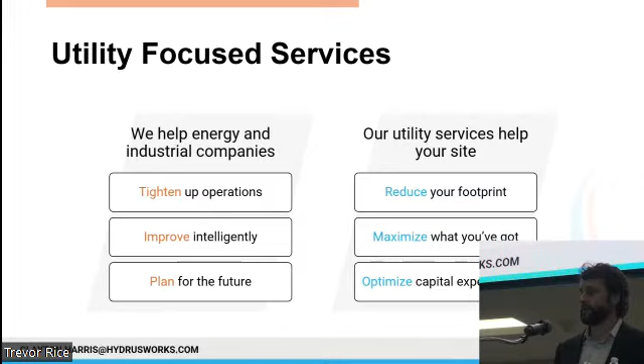What we do at Hydrus is we help sites struggle with their industrial utilities. Most of our clients are refiners, so whether you're looking at improving your utility system, planning for the future, or whatever it is you're trying to focus on with utilities, we should be able to help you with that.

So I'm going to preach to the choir a little bit. If you've ever spent any time in utilities, we think utility systems are important. They serve the needs of multiple processes, and they are the only systems that can impact an entire operation. So it's not hard to imagine, if you lost a steam system or lost your air system, how quickly the processes are going to shut down.

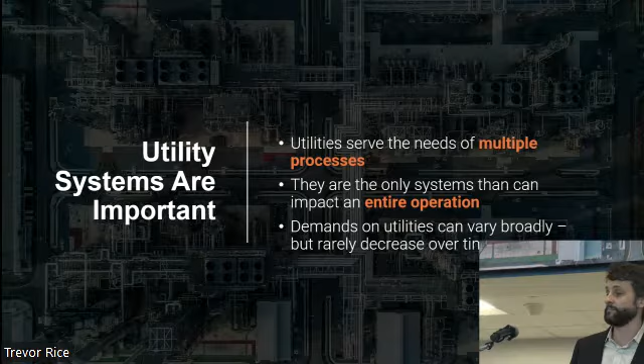So they are important systems, and the demands on these systems can vary broadly from day to day and sometimes season to season, but these demands are rarely going down. These utility systems are put under more stress and more strain over time, as more expansions and more needs are put on these systems.

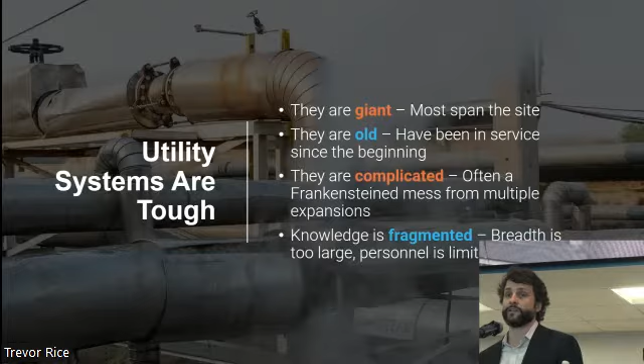They're tough systems. They are giant and old. They span the entire site, and they've been around since the beginning. So since that first column went up, there was probably a utility system built nearby to support that process. And so they end up being these complicated Frankenstein monsters that have been kept alive over the expansions of the plant.

Over 50, 60, 70 years, and because of this, knowledge tends to be fragmented. You're lucky if you've got a single person that knows a whole lot about a single utility system, let alone a team that knows everything about all the utility systems. The breadth is just too large. These systems are just large, complicated spaghetti bowls that are difficult to manage and difficult to control.

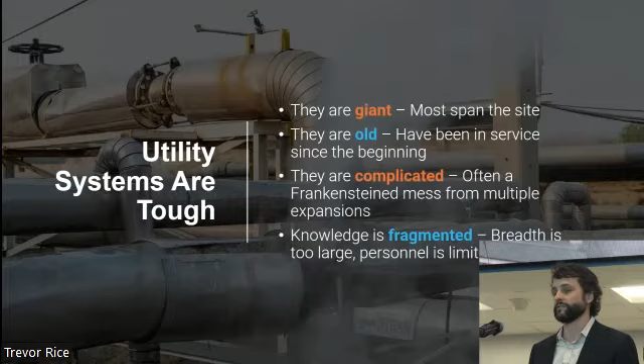Historically, they're low on the totem pole. They are not the most attractive systems to work on when it comes from a dollar standpoint. Improvements in utility systems don't always have a clear ROI, and if they do, they're typically measured in decades instead of months or years.

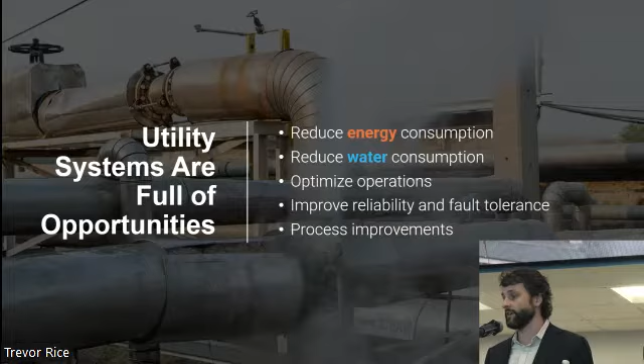And so most of the time when we get involved in a utility project, it's because there's a recurring pain point or a process improvement that knows it's gonna be using a lot more air, steam, water, or whatever it is they're after. And because of this, utilities tend to be full of opportunities to reduce energy consumption and reduce water consumption. Often there's opportunities to optimize operations in general, improve your reliability, fault tolerance, and then also sometimes you can get some process improvements out of it.

So we think utilities do better with what's called a continuous improvement approach, or continuous improvement cycle. If you're not familiar with this, it's a little bit different than the project container that a refiner, a petrochemical site might do. But I've got here 3 basic steps, and I'll talk a little bit more about this towards the end.

The first step is to standardize the work. That's to lay out your documentation and rules for when you're going to tackle a utility system or deal with a problem in it. The second is to make incremental improvements, and I want to stress incremental, because a utility system is again this giant spaghetti bowl with a bunch of components, so you've got to improve these little components one at a time. You can't make one blanket improvement to a utility system and solve all your problems with it.

And the third step is to retain and fortify that knowledge. So you're going to learn something about it when you make an improvement to your utility system, so you've got to hold on to that knowledge. You've got to fortify that knowledge and make sure that it doesn't leave when the next person comes to tackle a problem with the utility system.

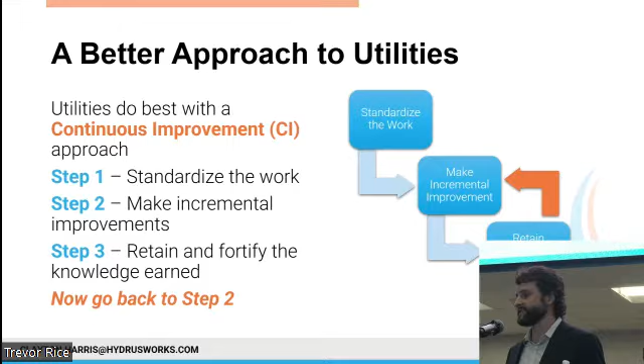Once you've done step 3, it's time to go back to step 2. So it's a cycle. You want to make an improvement, learn from your mistakes, learn from your knowledge, make an improvement, and continue and repeat over and over.

So where to start? The best place is at the beginning, of course. And I'll define how we think about a utility system. But all a utility system is in this context, in a refiner's context in particular, is the infrastructure and equipment that provides the essential resources to support the processes. That's water, steam, air, hydrogen, nitrogen, fuel gas, all the fluids that are in a big piping network that's going to be delivered to the main process so that it can do whatever it is that it needs to do. It consists of suppliers and consumers.

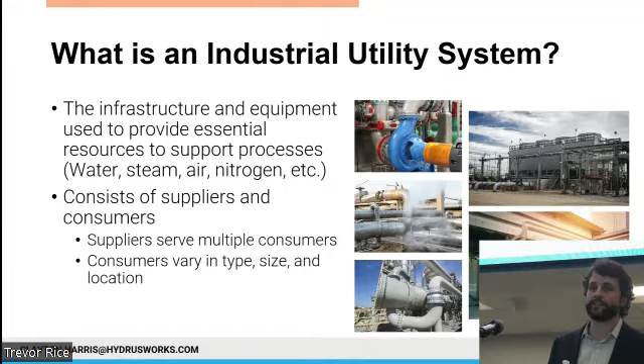Usually there's a handful of suppliers that are meeting the needs of a wide variety of consumers. Consumers can vary in type and size and location. Again, they're going to be scattered all over the site.

So you're going to need a tool. Again, there can be hundreds of components influencing utility systems.

These individual components are often well understood because they were designed by somebody with some intent for a process. So they understood their little box that their project was in. They knew how big their pump needed to be. They knew how big the turbine that drove that pump needed to be. But how all these components act together is not always as well understood. And so you're going to need an analysis tool to help you with that. This is a big system, so you've got to be able to understand how it behaves as a whole.

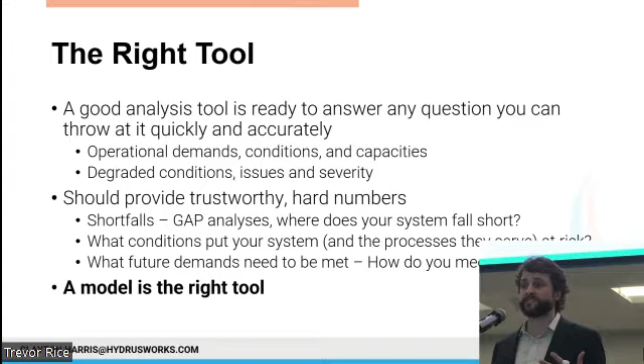The right tool needs to be able to answer any question you can throw at it pretty quickly and accurately. It's got to help you understand your operational demands, conditions, capacities, your degraded conditions, your shortfalls, help you conduct a gap analysis, help you plan for your future needs, and understand what kind of conditions are going to put your system at risk and the processes they serve at risk. So a model is going to be the right tool for that.

And in this case, in a utility system, not just any model, but a hydraulic model. All of these components, in most cases, are going to be connected by a large pipe network, which means they're all hydraulically connected, so any component can influence any of the other components on the system. It's not hard to imagine if you turn a pump on one side of the site, you're going to see an impact on the other side. Or if you turn a large user on one side off, it might affect all the other users on the site and steal flow and things like that.

So hydraulic models really are an essential tool to understand a utility system, what it's doing, and its operational parameters. And what we've learned from doing this time after time is that if you develop it correctly from the outset, if you take the right approach to building a good hydraulic model for your utility system, it can be the foundation of this continuous improvement approach that I mentioned at the beginning.

So let's talk a little bit about how we do it and some of the lessons, or tips, we've learned from building these utility models. Marketing folks like me like to break it up into 3 easy steps, but I think they're kind of 3 complicated steps. So the first step is measurement.

You've got to have good information, good data. And in a utility's case, utility systems aren't typically well instrumented, so that means going out in the field, looking at these systems, measuring, getting flow, pressure, temperature, whatever it is you need to get a good basis for that model you're about to build in the second step.

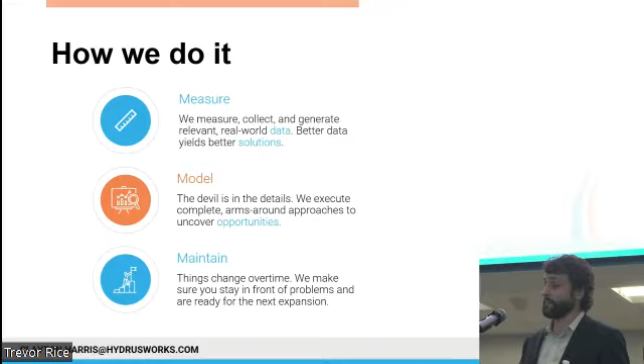That second step is model development. In a utility system, the devil's kind of in the details. These are again giant spaghetti bowls of systems, and so you've got to get your arms all the way around your systems. A lot of times what we see is an engineer focused on some kind of process improvement draws as small a box as possible around their modeling effort when it comes to utilities.

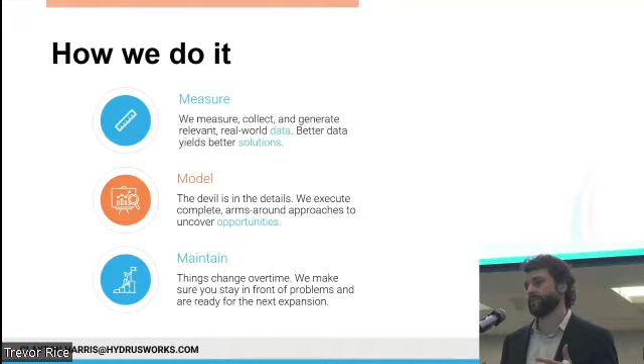And so what you end up with is a lot of simplification, and you don't really understand how that system operates, because they tried to answer that question in their little box and make sure everything was okay on their components, their system, or their part of the system, but they don't look at the system as a whole. And that's really important to do.

And then the third step is something we don't see often enough either, which is maintaining it. If you go through all this effort to build this big utility model that reflects that system, you've got a good current condition model that behaves like it does in the field today. You've got to maintain that, because that accuracy is not permanent. That system is going to change over time, so you've got to put effort into maintaining the model you've built.

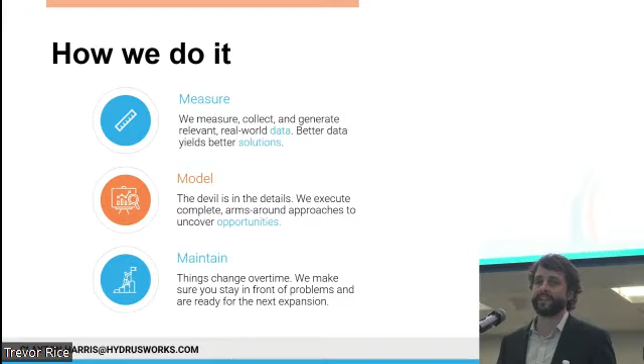So we break it into 2 phases. First is the bear hug phase. This is where you're going to get your arms all the way around the system, spending a lot of time understanding its demands, its capabilities, its limitations. And once you've done that big first effort, you're ready to start answering the real questions that probably got you looking at that system in the first place. So you do your analysis, your what-ifs, look at different scenarios to understand what's happening.

The second phase is the evergreen phase, which is the maintenance phase. This is where you're keeping your arms around the system, staying in front of your problems, prioritizing, managing, and tracking issues, things like that, to effectively meet your demands and make sure your utility system isn't the reason for some kind of problem with the process down the road.

So I'll talk a little bit in detail about model development. Your model's got to be comprehensive and multi-purpose. If you start with the approach of just drawing your box around your problem, then you're going to miss the mark. You've got to start from the outset to be able to answer any question with that model. You may answer your specific question that got you modeling in the first place, but if you design it right from the get-go, you can answer a lot of questions coming down the road.

You've got to aggregate all the key data in this model. These systems are so large that there's a lot of information that has to be put into it - your design data, your physical data, your historical data - all that needs to be reflected in that model in its current state. If you've done your job right, it ends up being better than PFDs, P&IDs, plot plans, data sheets, and PI data, because it takes all of that information and reflects it in a single source or a single representation. What you end up with is a really good tool to do a lot of different activities related to a modeling system.

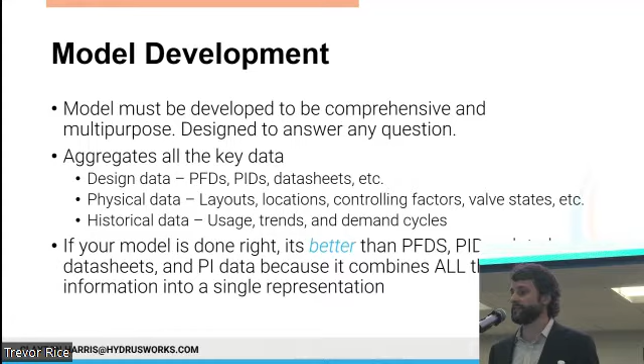So a couple of pro tips when you are hydraulic modeling a utility system. Be consistent - this probably goes without saying, but you want to formalize your modeling standards, your data standards, and your reference data. Your models should look and feel similar across the same site. So if you've got cooling water system A and cooling water system B, it should be easy for a user of the model to jump from one system to the other without having to reorient themselves and spend two hours trying to figure out which way is up.

If you've ever inherited somebody else's complicated spreadsheet, then you know that it's pretty easy to understand what I'm saying there, because cleaning up somebody else's mess is always difficult.

Traceability is important. Your references, your data sources, that all needs to be traceable. You need to have a trail of breadcrumbs so that you can follow where different pieces of information came from. That means documenting your operating conditions, the model boundaries, and your limitations. The last thing you want is someone else to use your model in a way that it was never intended, so you've got to have good documentation on that type of information as well.

Also recommend maintaining a chain of custody. Utility engineers don't tend to sit in that seat for very long - a lot of places put the new chemical engineer that's working their way up the ladder in that role. They spend a year or two to cut their teeth on site and then go from there. So that traceability, that chain of custody, is important when it comes to that model.

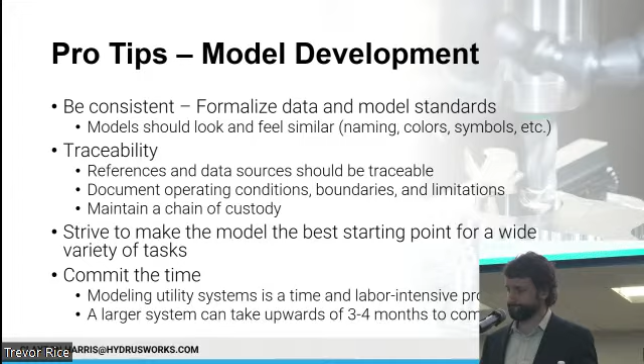Evergreening. A lot of times you build a model to answer a specific question and then you put that model on the shelf. You've got to resist that urge to just move on and do the next thing. You've got to maintain that accuracy and the value of that model because it does degrade with time. Utility systems are moving targets, but they are slow moving targets, and you've got to keep up with them.

Utility systems, again, serve multiple processes. While you may have answered your one question that you needed to answer, there's going to be more questions because these utility systems are serving 6, 7, 8, 9, 20 different units - one may be in turnaround and not go in turnaround for 5 years, but there's certainly going to be a couple other units going to change their impact on utilities.

Same thing, commit to evergreen your models and reference data, so standardize that. Integrate it into your engineering phases, your engineering processes, your engineering cycles. Make a decision on when a model needs to be touched and when it doesn't. And I would advise you, don't let those small details get lost in the noise.

So again, there's so many different components that can be connected to a utility system. If you can formalize that when you update your model, even though it's one small turbine or one small exchanger that might get turned on or turned off, don't let those details get lost in the noise. And if you've traced all that back, then you'll have a good history related to that model.

More pro tips on the evergreening. Be consistent. Formalize your evergreening requirements, so not just the way you build the model, but the way you take care of it. Formalize routine refreshment. Even if nothing's happened in the last 2 years to this utility, somebody needs to take a look and make sure that nothing's changed. Consistently remeasure and recalibrate. So go get fresh field data. Pull fresh instrumentation. Require those interim changes to be included because again, they may be useful in retrospect.

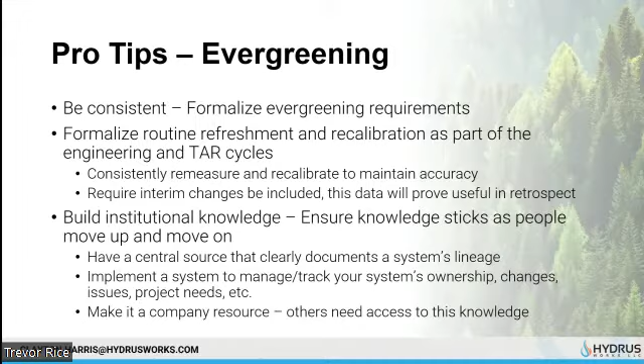And then the last one I see a lot of places struggle with is build the institutional knowledge. So that model and all the reference data around it and the traceability, the chain of custody, all those things I've talked about, really the main point of that is to fortify that institutional knowledge. So you need to have a central source that containerizes all of that information so that when one utility engineer moves up and moves on, moves to a different company, all that knowledge isn't lost when the next person that sits in that seat has to deal with that utility system.

So you need a system to manage and track that system's ownership, changes to the issues, projects that have affected it. And I'd recommend you make it a company resource. So make it in a way that you might have one utility engineer take care of that container of information, but make it accessible so that if anybody needs to touch utilities, which everybody eventually does, they've got access to that.

So I've got a couple energy savings examples from some recent projects that I'll talk about. First one is boiler feed water pumps. This client was having trouble getting some boiler feed water to one of their remote users. So they asked us to come out and develop a hydraulic model, and we did a lot of field testing so that we could validate that model. In this case, we logged pressure and flow for a week, pressure in 14 locations, flow in 8 locations, so we could get a good understanding of that system and its operational envelope.

And what we found out, because we went that extra mile to get that model good and valid and trusted, is they had a control valve that they had artificially raised the set point on for a nearby user so they could try to force water to the remote user. And what that had done is it had backed all these pumps up off in their curves. So now their operating pressure was high. These pumps had pretty flat curves, and so they weren't getting the flow performance they need.

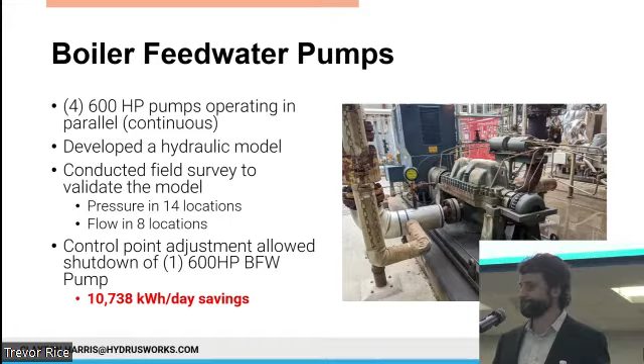Another one is raw water pump optimization. This particular system had 5 pumps, 2 systems that were jumpered together, feeding 2 clarifiers. And they were getting ready to put in a new cooling tower, so they wanted to make sure they weren't going to tax their raw water system too hard.

And so we developed a hydraulic model. Same thing, we went and measured flow and pressure so we could get a good calibrated model that was reflective of the current conditions. And what we were able to do with that model as well is help them come up with a pump combination operating map.

So we were able to map out, these are the best combination of pumps to operate for 4,000 gallons a minute, and these are the best pumps to operate for 2,000 gallons a minute. And so you always have the most efficient pump combination operating depending on the different demands as they fluctuate

throughout the seasons. In this case, 1,600 kilowatt hours per day of savings on average, not quite as big as the boiler feed water pump, but again, this was no cost beyond the cost of the study, so it's a pretty good benefit for them. It also reduced some wear and tear on some control valves at their clarifier inlets, so they were throttling their pressure right at the end of the control valve.

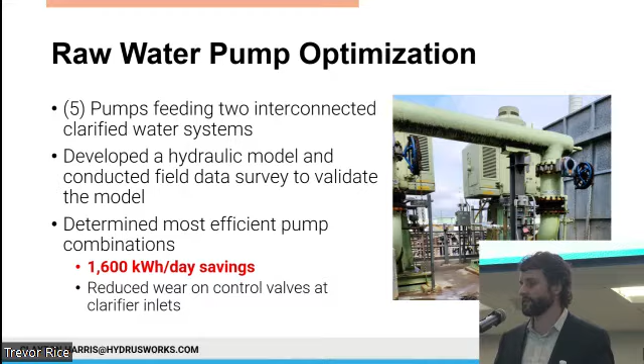Last one I'll talk about is the cost of a spillback. So in this particular example, we're working on a jockey pump system for their firewater system, and we noticed that they use a spillback to maintain pressure. This particular site was using one of their firewater pumps, and then they would use a spillback to just maintain that pressure. So they would just dump all this water that they had picked up out of the river, put under a bunch of pressure, and then they would burn it across that spillback valve and dump it

in the river. And so we did a usage survey to understand where the water was going and what it was doing, and we were able to prove to them that 3,600 kilowatt hours a day is wasted by picking up that water and just throwing it back in the river. So that's not just the cost of running the pump, that's the cost of the energy that went into that water that you just threw right back in the river.

And so just that little exercise alone was enough to prove to them that, hey, consider a VFD, the payback period's pretty quick on this, so you can actually control that pump in a much better way. And in this example, there's also some water savings, so we're looking at recycling some wastewater effluent. I think the site used about 1,500 gallons a minute, so that reduced their footprint by about 25%, or at least closed the cycle for about 25% of their water usage on site.

Food for thought. If you're looking for energy savings in utilities, parallel pumps, there's almost always opportunities there. We stare at those systems all day, every day, especially if they're not clones of each other. So if you've got a bunch of mix and matched pumps, they like to push each other around and keep each other from being at their best efficiency point. So pumps don't always play well with each other.

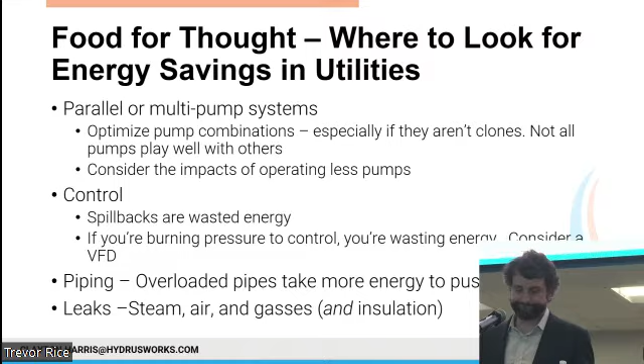So, to kind of wrap this all up: again, utilities do better with a continuous improvement approach. Require comprehensive hydraulic models be developed for all your major utility systems. These are giant systems, they're hard to manage. A hydraulic model ends up being a really useful tool to manage them.

Require the modeling of any changes. Anytime you touch that system, even if it's taking a pump down for a couple months to swap it out or whatever, use that model to understand the impacts. And then require that you evergreen those models. It's a significant investment to get a good utility model of some of these larger systems, so it's a lot cheaper to maintain that model and stay up with it than to start over every 3 or 4 years when you've got the next turnaround coming.

Step 2, leverage that model to make those incremental improvements. And you've got to accept small improvements. Again, there's tons of components that are tied to these utility systems. So if you can make an improvement on component 1, 2, 3 of the 300, eventually you're going to get a net gain in efficiency. But you've got to accept small improvements. There is no utility project that's going to fix all the problems in a utility system. You've got to just make these small individual improvements.

Well, one thing we recommend, and project managers don't love this one, but consider small improvements every time a project touches utility. So if you've got a process improvement, process expansion, make sure that they leave the utility system in a better place than they found it. Most projects want to make sure that utility is going to meet their needs, and they check that box and they move on. And so it's not unreasonable to make them improve the utility system incrementally anyway.

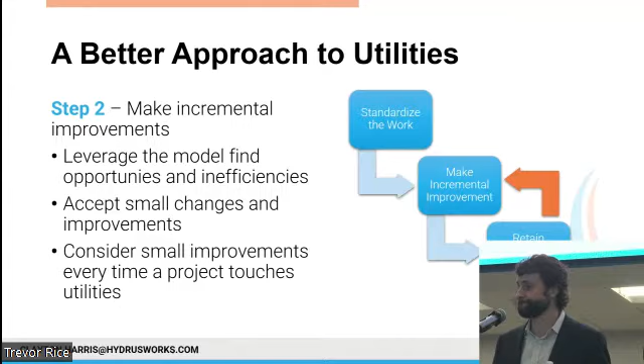Last, retain and fortify that knowledge earned. So build that institutional knowledge. It's important, or you're going to be fighting those same battles over and over. So that one's pretty obvious. But you can formalize that revision control, formalize your chain of custody, formalize that reference data, formalize how you track all the information and supporting data around that utility model. And then if you need to go all the way back to step 1 to revise your standards, that makes sense too. That's kind of part of the continuous improvement cycle in general.

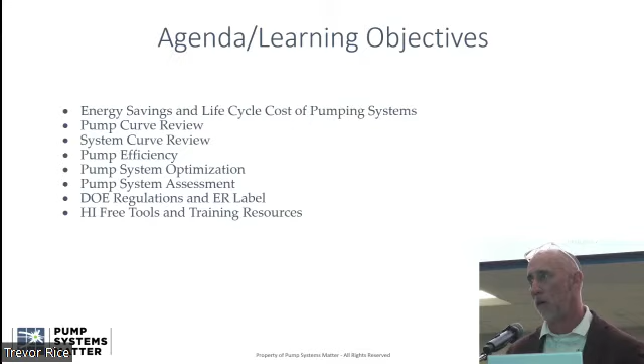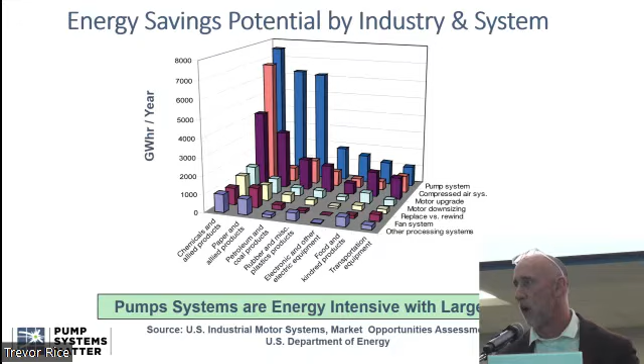As energy costs continue to increase, pump manufacturers understand that making equipment more efficient will contribute to saving energy, while traditional methods of specifying and purchasing piping, valves, fittings, pumps, and drives often result in the lowest first cost. These methods often produce systems with unnecessarily expensive energy consumption as well as maintenance costs.

So just a brief overview of the pump curve and what we're looking at. When we go back to pump systems, to fully understand how to optimize or assess a pumping system, one's got to understand the fundamentals of pumping. That's generally one of our challenges in the industry when it comes to the Institute, the assumption that everybody understands affinity laws, or BEP, or AOR, or POR. So we've changed that assumption and gone back to more of a fundamental approach, especially with tribal knowledge leaving the industry and new students joining.

Energy savings are important, but in many cases the non-energy benefits outweigh the energy benefits. In order to financially justify an improvement, often you need to include the total cost of ownership. Energy costs are at the top consideration, but there are also values for non-energy benefits from high reliability, increased productivity, less equipment wear and tear, reduced production losses, environmental impact, and increased plant safety.

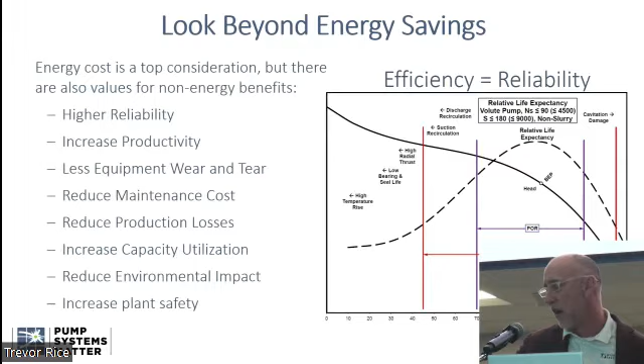We'll go back to this in another slide, but when you're left of BEP or right of BEP is when bad things can certainly happen.

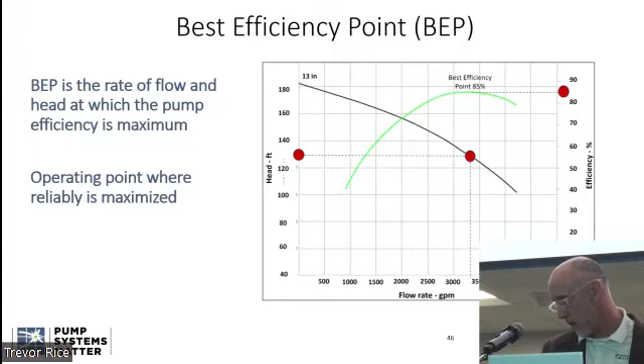Best efficiency point, again, is the rate of flow and head at which the pump efficiency is at its maximum operating point, where reliability is maximized. If you look at this example, it looks like the best efficiency point is at 85%. And if you look at the flow rate, at about 3,400 GPM, we'll be at about 85% at the best efficiency point for this indicated pump.

Real world operation uncertainty: in the real world, there's variation and uncertainty in both the pump curve and the system curve that result in an operating range over time. You have to account for variation in system head, the age and level of the system, and potential variation in the pump curve, and come up with a range of flows and head where the pump may operate.

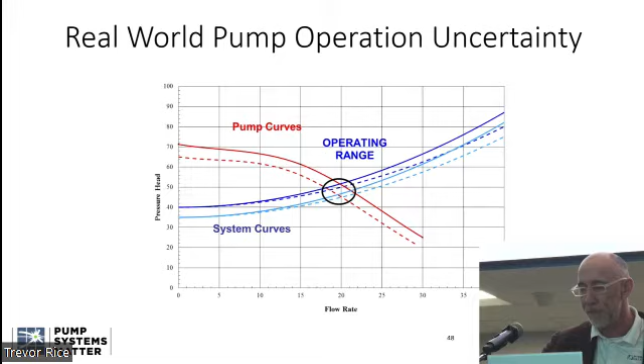Simplified pump curve: understanding that it's not always possible due to uncertainty to get a pump to operate at BEP, we aim typically for the POR. Generally the POR runs to either side of the BEP—the preferred operating range.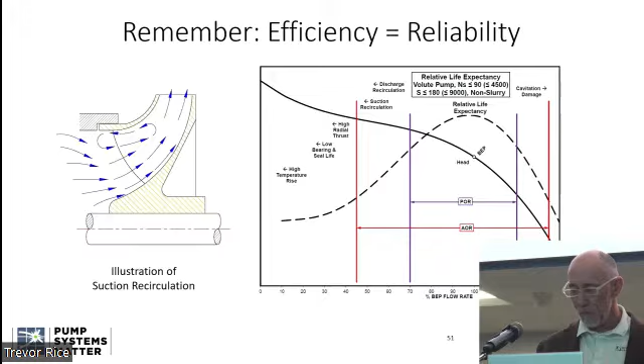So we'll go into system curve, and this is where we really spend a lot of time - on system curves and how to change the system curve from a design perspective in new designs. It's hard to change the system curve in an existing system. So I didn't spend a lot of time here.

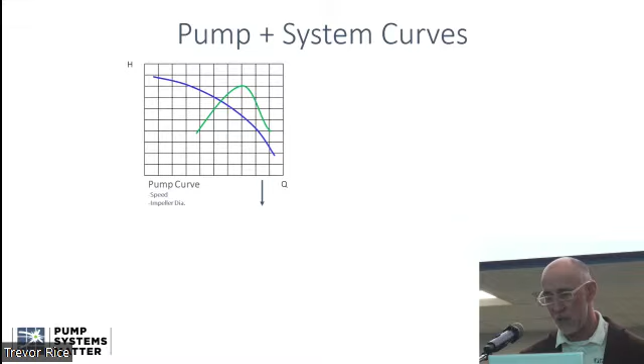But what I do want to show is kind of an overlay. So you've got the pump curve, as noted in the intro slides. The pump head and the system head will be the same. Similar to the pump, the system has a curve that is inversely sloped as a function of flow rate compared to the pump curve.

Therefore, the pump curve and the system curve will intersect at its operating point. So if you'll see here, the pump curve on the left in blue, indicated with the BEP in green with its efficiency, and then the system curve - as you put those two together, you get the operating point, which at this specific instance is at BEP. So that is where you're going to find the most efficiency when it comes to the curve.

This is a system equation for developing a system curve. I tried to keep this one as simple as I could, but I couldn't. If you'll look at...

The energy or the head required by a system can be described by physical equations. Shown here is the view from the pump. Remember, the pump will add energy required to the system. In the equation in the red box, the pump head will be a function of the pressure difference - H2 minus H1 in the illustration - elevation differences Z2 minus Z1, with velocity head differences V2 over 2G, and the friction loss with the system FL over D plus sigma K times V2 over 2G.

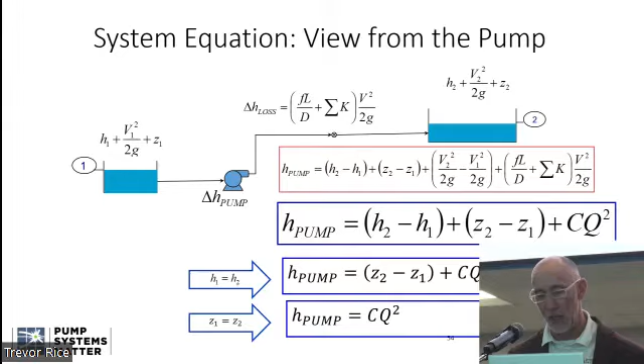In the red box, the equations are based on velocity, but if we have an existing system, we can usually simplify as we've done in the blue boxes, substituting flow rate Q with coefficient C in the velocity terms, because we assume friction will remain proportional to velocity. The final blue equation simplifies further by assuming the pressure at point 1 and 2 are equal. If the levels were equivalent, points 1 and 2, we could remove the Z terms, and the system would be totally friction head. So that's as simple as I can get with the system curve.

Pump efficiency - the definition for pump efficiency is the ratio of pump output power and pump input power, expressed as a percentage.

What is a pump and how does it consume power? A pump is essentially something that moves liquids, as you can see here. And I'm gonna answer the question on the VFD that was asked a minute ago.

There's a place for VFDs and there's not a place for VFDs. The assumption in the industry - from a pumping perspective - is that if you put a VFD on it, it becomes more efficient. That's not necessarily the case. In some cases, that is the case, but I've seen a lot of times where you put a VFD on a constant flow application and it turns into nothing more than a very expensive soft starter hanging on a wall. So maybe that answers the question.

So there's good and bad. We certainly don't want to give the impression, when we're optimizing or assessing pump systems, that just putting a VFD on it is going to make it more efficient, because that's not necessarily the case.

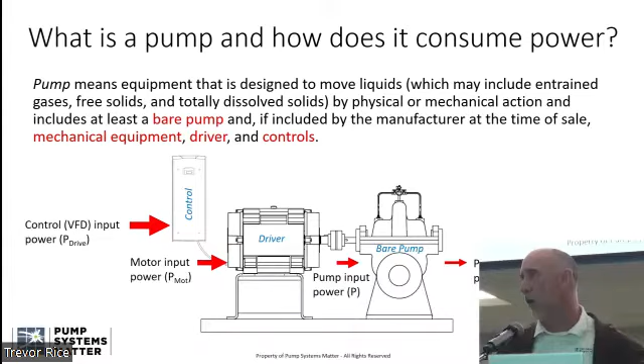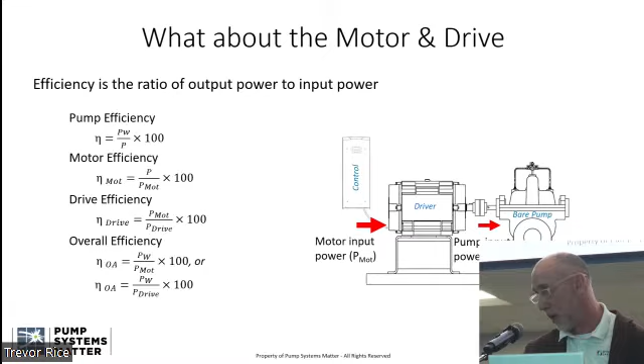This is generally the same indication here. It's going to show the efficiency going in from the backside of the motor. I can determine pump efficiency, motor efficiency, drive efficiency, and again, overall efficiency, just simply by performing these calculations.

Now we'll go into pump system optimization. What is pump system optimization? It's the process of identifying, understanding, and cost-effectively eliminating unnecessary losses while reducing energy consumption and improving reliability in pumping systems, while meeting process requirements, minimizing the cost of ownership over the economic life of the pumping system.

Opportunities in new design and existing design. Generally, if it's a new design, we certainly have better opportunity to design the system because we can look at the whole system holistically and make sure that we look at each component and design it with the best components in mind. Sometimes on existing systems, you've got to take the system you have and then try to embed it with some efficient components.

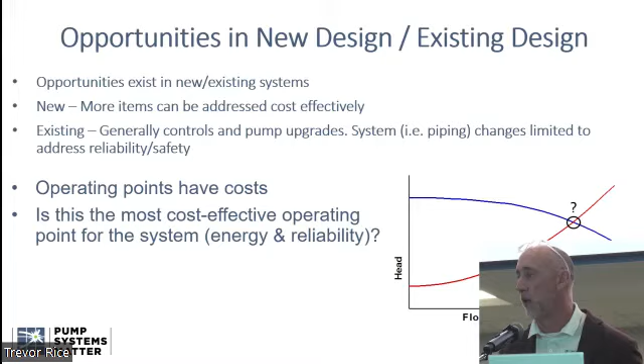Effecting cost reduction of pumps. By choosing different pumps, the pump curve can be adjusted. The pump efficiency and BEP also adjust. The pump curve can also be changed by changing the impeller size or fixed speed. So if you adjust your impeller or if you add a VFD or a control method, you have the potential of actually changing your pump curve to become more efficient or closer to BEP.

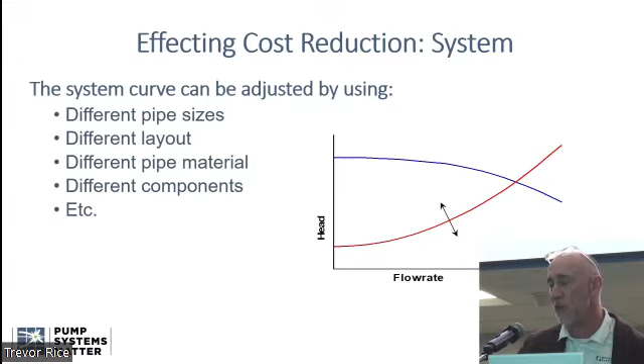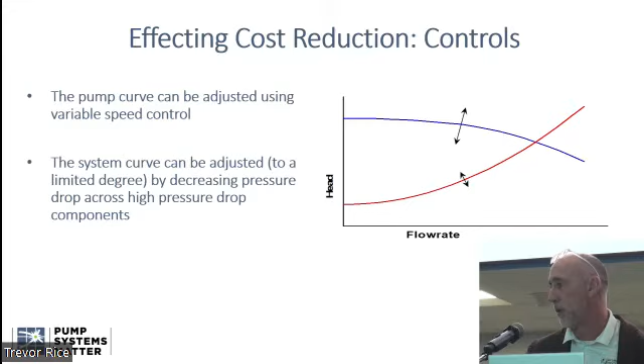Effecting cost reduction of the system, the system curve can be adjusted by using different pipe sizes, different layout, different pipe material, different components. Generally, your friction coefficient is really your opportunity for reduction in the system itself. The pump curve can be adjusted using variable speed control, as I indicated before. The system curve can be adjusted to a limited degree by decreasing pressure drop across high pressure drop components. And again, there's some opportunities for existing systems: repair the pump, impeller size change, VFD, potentially a new pump, and then in new systems, the opportunities reside in changing anything.

The operating point itself can be changed. Cost reduction opportunity is much larger.

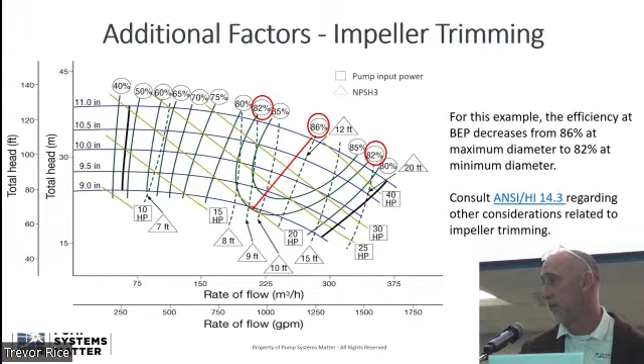Pump system assessment. I have one slide on this. We developed the only pump-centric certification or accreditation in North America. It's PSAP, which stands for Pump System Assessment Professional.

This was developed in conjunction with the Department of Energy and some utilities like PG&E in Southern California. They came to us and said, with the DOE making regulations on pumps, we're running out of opportunities for incentives for our ratepayers. Lighting's been done. We've done all the LED lighting. We've done compressed air, we're working on all that. With the knowledge that pumps are a large consumer of electricity, there's certainly an opportunity to decrease their load.

When these utilities started coming to us wanting to build these incentive programs, there's custom incentives for pumps that can be found readily. We're seeing more and more utilities developing deemed incentive plans around pump systems. The problem was who had the requisite knowledge to actually go in and perform an audit of a pump system. They didn't have anybody. It wasn't the lighting guys. The lighting guys weren't going to stop doing lighting and jump into pump systems. So what we did was we actually developed the PSAP about 3 or 4 years ago.

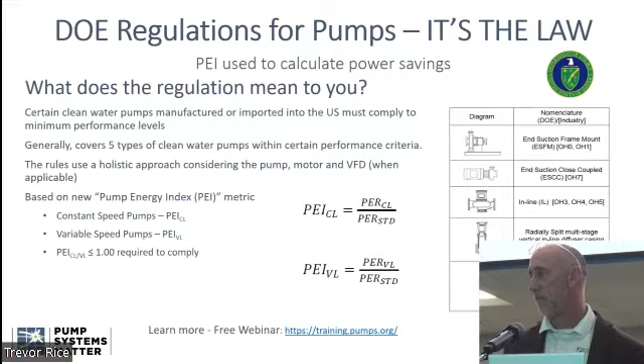So what we did was we took the manufacturers that we represent. They wanted to make sure that they provided some validity or extra level of validity in the products they manufacture, so they came to us with an approved lab. We audited a third-party lab for each manufacturer. Some of them, it's actually their own lab. We had to go in and audit it, and they perform additional testing for their pumps.

So we've got a database. They upload all of their pumps into our database. Those pumps are now being used as a qualified product list for utilities such as PG&E, Southern Cal Edison, Oncor. There's 25 utilities across the country that are using our database as a qualified product list for pump incentives.

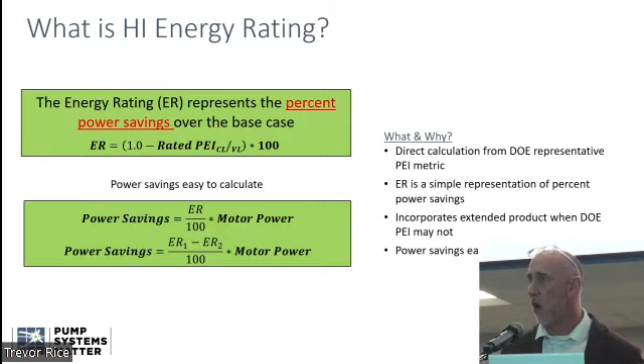What we did was we went past the PEI and developed an ER rating, which is the HI energy rating. Essentially, we took the ER, where the baseline is 1.0, minus the rated PEI - that's the number actually stamped on the pump by the federal government - and multiplied it by 100. So what you'll see here is essentially what an ER label looks like. It may be a little difficult to see.

This one here has a PEI of 0.40. Again, the baseline is 1, so it certainly falls within the baseline. Anything above 1 would not be able to be sold or manufactured in the U.S. So this one has a PEI of 0.40 with an energy rating, our ER label, of 60. The higher the number, the more efficient that pump is.

So in our database, you can pull these energy ratings. This energy rating is just for a bare pump. You can actually add an extended product to this ER label and come up with a new value. So if I added a VFD, and I knew the value of the VFD, or a new motor, and sold this as a system, I can give you an extended product ER label with that value on there.

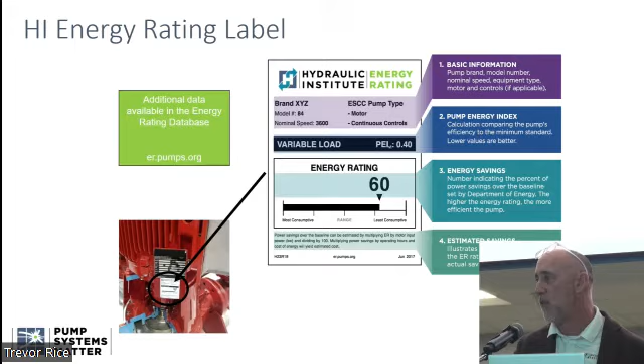The intention was not to use it as a selection tool, if you will. Is it? It most probably certainly is. But it gives the industry indications on the most efficient pumps out there.

Wrapping it up, HI and PSM free tools and training resources. On our website, you can find many tools, from flow modeling tools that we certainly use in our optimization and assessment.

MEASUR, which is the DOE's tool for PSAT - we've got a pump savings calculator on there. If any of you've got the old Hydraulic Institute blue hard copy book that was made in 1963-ish, the Engineer Data Library is essentially that book, and all of these are free downloads. So I'd suggest going onto pumps.org and taking a look at some of this stuff.

Industry knowledge path - we just completed a pump industry fundamentals body of knowledge, which outlines knowledge areas that individuals in certain disciplines and industries should have to work in the pump industry. Whether I'm an application engineer, a design engineer, or an operator, you can go through this body of knowledge and it will identify the level of knowledge for each principle that we identified.

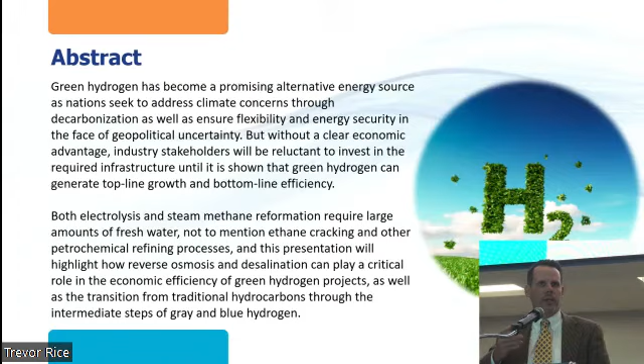The abstract on the front of the presentation is how reverse osmosis, Hatenboer Water, has been in the water industry for many years, and reverse osmosis desalination is our area of expertise. But how does that fit into the conversation we're seeing now around the energy transition, the next generation of fuels and energy sources? Green hydrogen is one of the things the industry has rallied around, and the byproducts of that, maybe ammonia for alternative propulsion. So I'm going to talk about how electrolysis and pure water reverse osmosis fits into that.

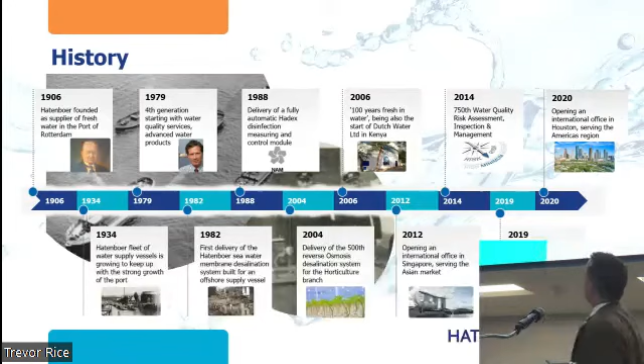Hatenboer itself, and I'm going to be the first one to use the highlighter. The reason I highlight this is because Hatenboer Water has been around for a long time in the Netherlands, since 1906, and the only way that happens is by being adaptable and adapting to the industry.

They started with water taxis, bringing water out to vessels in the port of Rotterdam, and then from there, it's like we should also produce the fresh water on board. We should provide the equipment that provides that fresh water, and that's going to become relevant as we move into this. Around the world, a lot of installations respond to the offshore industry. Probably 75–80% of our business is offshore and support vessels, maritime applications.

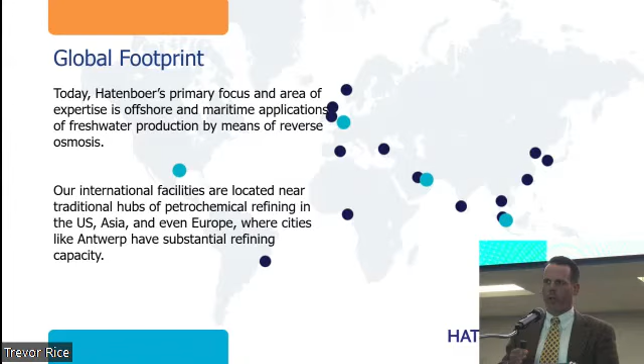But some of those locations are also near the downstream refining complexes, and that's relevant here because energy and water have always been very tightly connected. And in this day and age, as we'll get into, you've probably seen in the news, water becomes increasingly scarce. And how does that fit into the energy sector, downstream, upstream? That balance becomes ever more fragile. And so how do we fit into that?

Historically, evaporation has been one of the main solutions to provide fresh water. There's a couple of different technologies there. Historically, one of the first MED plants, multiple effect distillation plants, to do desalination was installed in the Netherlands Antilles back in 1928, I think. And so that was historically the way a lot of this desalination and freshwater production took place.

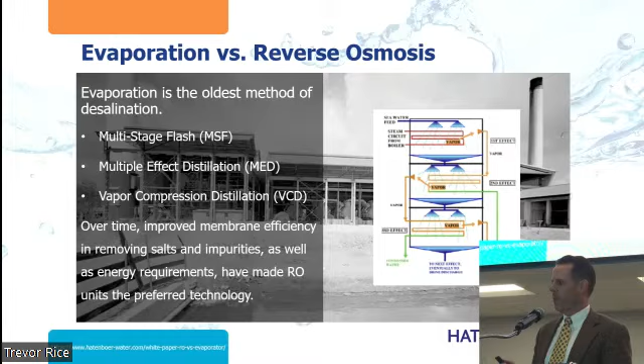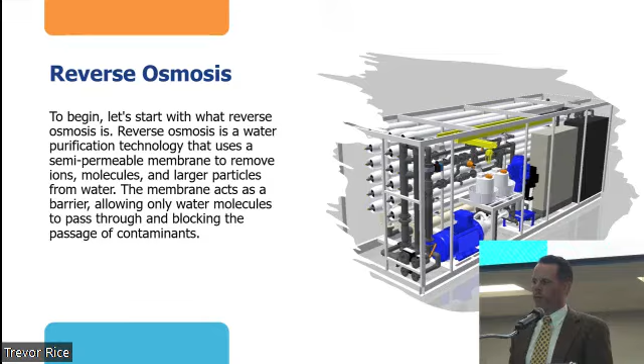But the energy efficiency considerations and the improved quality of filtration systems in the membranes and reverse osmosis systems has started to make that become the preferred solution. And that then moves into just strictly reverse osmosis. I think people are a little bit familiar in here, but that's a basic process using a membrane to filter fresh water out of salt water.

There's a natural osmosis. I don't know if anybody remembers back in biology class trying to put your textbook under your pillow and studying for an exam by osmosis, thinking it's going to go in that direction. But fresh water naturally wants to go through a permeable membrane to reach an equilibrium with salt water on the other side of that membrane.

Reverse osmosis is simply the reverse of that process, as if you were going to download from your brain back into the textbook. What you do is apply a mechanical pressure on the other side to overcome that osmotic pressure and then force the fresh water back in the other direction across that membrane. That membrane then filters the water to reach the level of purity required. A lot of what we do at Hatenboer is for drinking water applications. So big offshore vessels will use reverse osmosis plants to produce fresh water on board for drinking water.

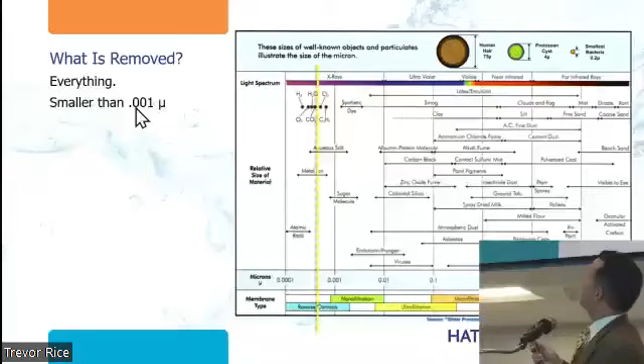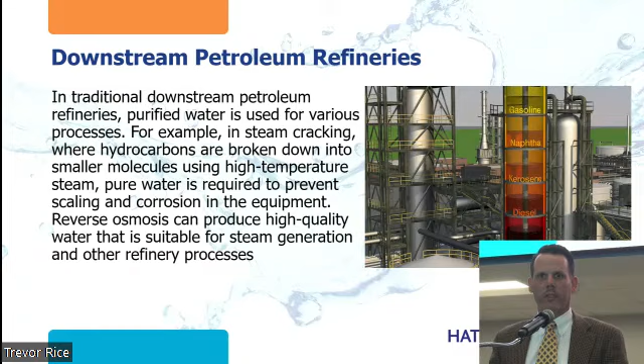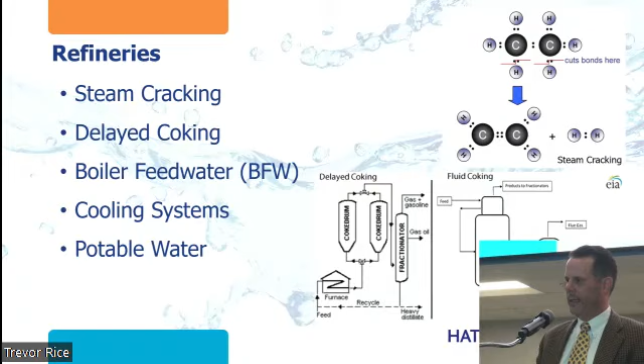So I'm touching on the downstream side of things. I'm, like I said, more upstream, but I think you guys are all familiar with reverse osmosis, or at least water purification for downstream purposes. Steam cracking, boiler water, I think we talked about earlier, pump applications, cooling water. All of those processes in downstream refineries require fresh water. And here I have it, potable water also for facility applications, but cooling system, boiler feed water, steam cracking, delayed coking, even you would use some water for cleaning those tanks. And so those are some of the requirements of refining water.

And so I bring all of this up because for reverse osmosis, from our point of view, we're familiar with some of these applications and the level of water purity required for these applications. And so that's going to transition, because we have that experience and that history in these applications. In the energy transition, how are we going to take some of these processes and applications that we all have many years of experience with, going back in Hatenboer's case 100 years, with refineries and downstream applications, and take that same knowledge base and that same experience into the next generation?

And I pointed out that we're right here at the end of OTC, and if you walk around the OTC, you see a lot of companies that are no longer oil companies or drilling companies or petrochemical companies. They're now energy companies. And the reason they're talking about that is because they have the experience, they have the engineers, they have the knowledge, they have the installation base in many cases, they have the offshore assets even, that can then be used in this same transition.

So I think it's not so much a zero-sum game. Some people think, oh, as long as we're talking about renewables or transitioning into the next generation, we're somehow taking people's jobs, or taking money that we've invested in infrastructure from one sector and moving it to another, where really I think it's all about adaptability, just like I mentioned with Hatenboer, moving through 100 years, multiple generations, and adapting to new developments.

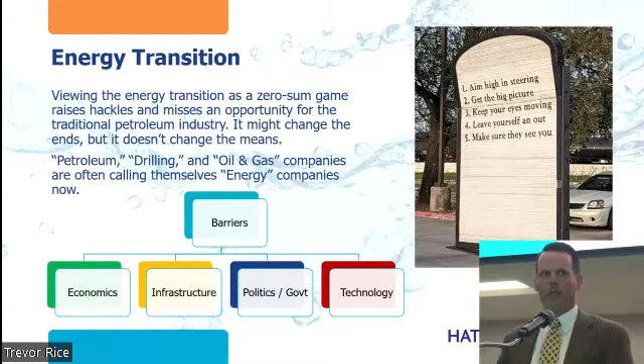Politics and government really come into it as well when you talk about government subsidies and how are we going to finance the scaling and some of the investment required to move into an energy transition, and the technology goes along with that as well.

Oh, I didn't realize this part was animated.

So this speaks to some of our history in the offshore industry. We traditionally provide reverse osmosis and this technology to offshore platforms. And we really advocate a complete solution to provide safe water on board, not just for the technical applications, but also for drinking water and all of the hotel and accommodation services on offshore platforms. And there is a long history. We've been in the industry for a long time, and we've provided water systems and reverse osmosis to offshore platforms.

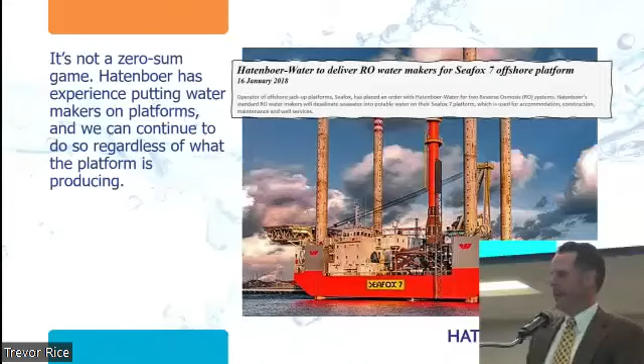And again, with the transition, does that then mean that we can't transition once we move away from some of the traditional offshore platforms that we've provided desalination systems to? No, we're really providing the same knowledge base and expertise, just to a different end. It's the same means, but to a different end. And so we can provide this reverse osmosis system to platforms regardless of what they're producing. So here, we have the knowledge, we have the technology to move into this next generation, this next energy transition.

And I joke sometimes with my Dutch colleagues that a lot of times maybe Europe has a plan for 2030. America's is maybe 2050, but as soon as you point out the economics of it, and we can make money at it, the U.S. is pretty well adapted to making money at these things. So we have the technology, we have the knowledge base, the people right here in this room, we can make this transition.

And so a little bit of background on hydrogen itself. There's kind of a big color palette. It seems like it's ever expanding. The main colors we're talking about are gray, blue, and green. This may be a little simplistic, but just to give context, gray hydrogen production is when you're using steam methane reformation. You need water for that application, but that's using hydrocarbons to produce hydrogen, and it has carbon dioxide as a secondary product, so you're still polluting. So that's the gray traditional. We're making hydrogen, but we're still emitting greenhouse gases and carbon dioxide.

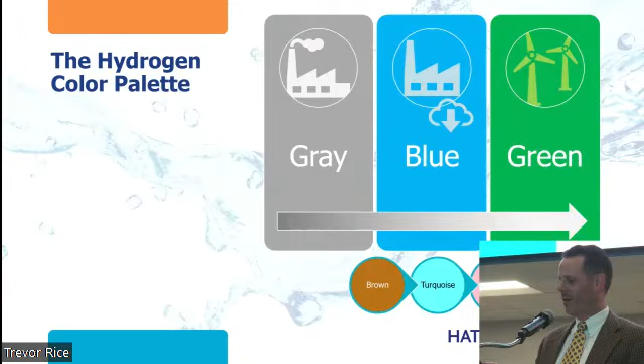And so we have experience. Yes, I got a chuckle. I was wondering how my Big Lebowski reference was going to go over.

But we have the experience. Steam methane reformation, creating gray and blue hydrogen. We know how to do it already. We have the technology, we have the experience. If you want hydrogen, I'll make hydrogen. That's what the Gulf Coast, I think, is saying. That's what we know how to do. We have made hubs for LNG ports and distribution and all these things. We'll do the same thing. It's just now for hydrogen.

So gray and blue, I went through the colors, but both processes require a large amount of fresh water, and that comes into the economics of things. Where are you going to locate these plants? How are you going to produce this gray and blue hydrogen or the green?

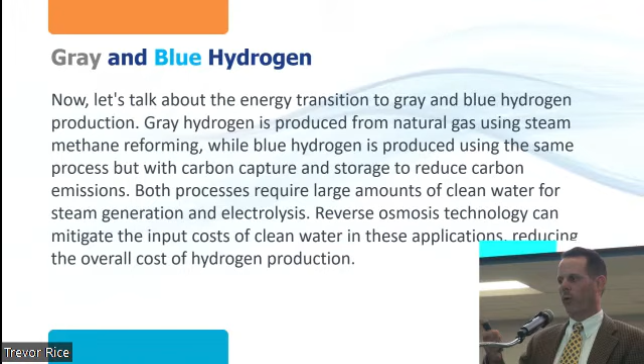Basically, through green, you're going to be using electrolysis, which is converting basically the H2O into H2 and O. But then steam methane reformation does the same thing, but you need water either way. So that's where Hatenboer comes in.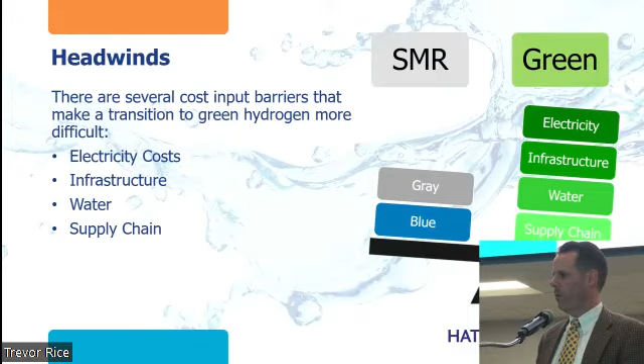How do we make that transition? How do we make that the more economical solution so that we're producing maybe the next generation fuel of the future, alternative fuel, but also not harming the environment and creating the emissions that we're doing with gray and blue?

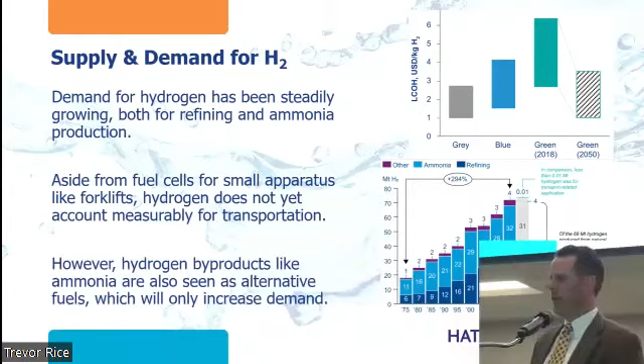The market demand there on the bottom for hydrogen, a lot of it is for refining purposes, ammonia production, and a small piece of that is the transportation. You've probably seen in the news a little bit, hydrogen fuel cells, which are currently used maybe for small forklift type applications, but I think Toyota is now creating a hydrogen vehicle where the only emissions would then be water. So the demand for hydrogen is increasing. So how are we going to meet that demand? And how are we going to do it with the assets here?

Green ammonia has been used, especially in the maritime industry, where most of our experience comes from, as an alternative fuel. Today, most of the demand from the chart on the previous slide for ammonia goes towards fertilizer, but ammonia is also being looked at as an alternative fuel. Engines are already being designed to utilize ammonia, but also what I'll get into on the offshore side, and where some of the conversations I've had with Alan before came up, is once you produce that hydrogen, how do you then get it to market? How are you going to send it through pipelines and avoid some of the hydrogen embrittlement problems that would happen there, or use ammonia perhaps as a carrier? And so that's where a lot of the hydrogen future is going.

And then this gets into just kind of the economics of it. In economics class in the past, I had a professor that always talked about public goods being non-rivalrous and non-exclusionary, and street lamps were always the example. It's hard sometimes to get people to invest in something when, in the example of a street lamp, if your street needs light and you put a street lamp in, you can't prevent everyone from also taking advantage of that benefit. It's also not consumed. One person can't take up all the light in any way. So how do you finance projects that are really a public good?

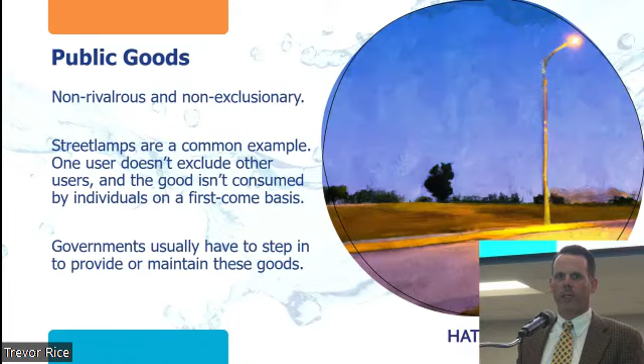And this kind of topic came up talking with a colleague on the hydrogen production side, because with Hatenboer-Water, we do freshwater production on board vessels. We also put that into bottle filling stations, for example, to eliminate single-use plastics while these vessels are at sea. And in clean beaches, not having the Great Pacific Garbage Patch, with all the microplastics floating out there. Who's going to take care of that? Who's going to invest in the things that are required to protect those public goods?

Existing technology, not very risky, not a ton of capital required - small business, you can put that on your credit card sometimes. If it's becoming increasingly risky or requires a lot more capital to invest, that's when you start getting private equity and VCs investing in it. But if it's super high risk, super new technology, the only way you're going to get that moving forward is with a little subsidy from the government to push and support those public goods that are really in all of our interests. The small time capital is just not going to be able to take care of that.

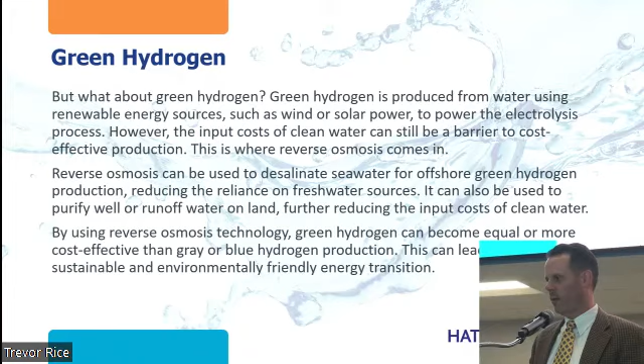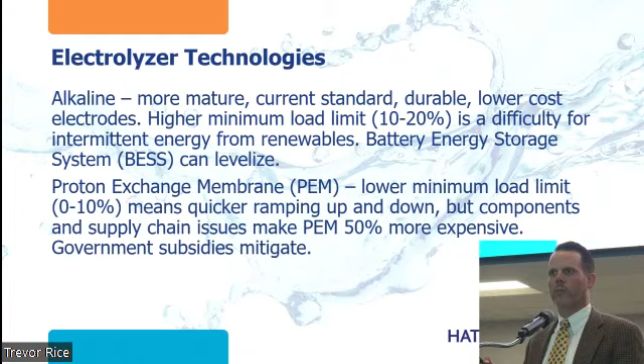Green hydrogen, I've talked about where that's going to come from - it's going to come from electrolysis, from fresh water. How do we scale that up to produce green hydrogen? Electrolyzer technologies - alkaline is one of the existing ones. Proton exchange membrane, PEM, is a newer technology, a little more expensive, but with a quicker ramp up time. These are the things that need to be invested in so we can make this transition. But in order to electrolyze water to produce hydrogen, there are pure water requirements, and this is the adaptive piece I was talking about earlier.

We're familiar with pure water requirements, even for hydrocarbons, even for downstream traditional refinery applications, even for steam methane reformation for gray and blue hydrogen. We're familiar with these requirements. We can go back and look at reverse osmosis - we remove everything, or nearly everything, for drinking water purposes.

Looking at some of the electrolyzer requirements today, they require either ASTM type 1 or type 2 water. ASTM 2 we could probably reach with two-stage reverse osmosis, where reverse osmosis takes the seawater and produces what we call permeate and concentrate. Permeate is the produced freshwater, concentrate is the now concentrated salt water that we discharge. You would then run that fresh water again through a second stage reverse osmosis to get it even purer. Type 1 is beyond reverse osmosis technology - that requires some EDI technology, electro-deionization, which we can also do with partner companies. But this is the level of water we're trying to achieve, and it's only through electrolysis and pure water production that we're going to achieve these levels.

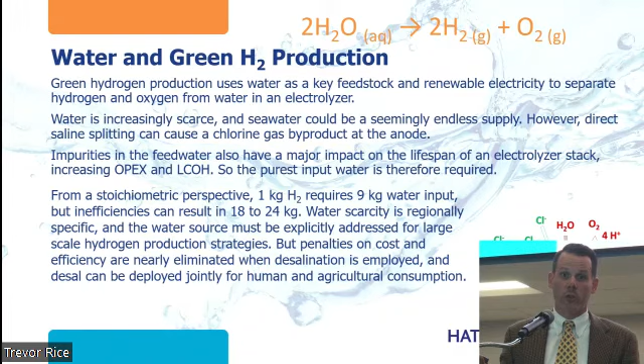So where are you going to get that water from? That's where the economics come into it. And there is no more abundant source, really, than the Gulf of Mexico or the seawater right next door to the places that are trying to produce this water.

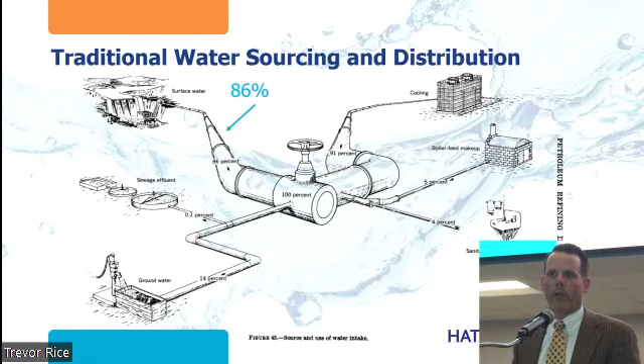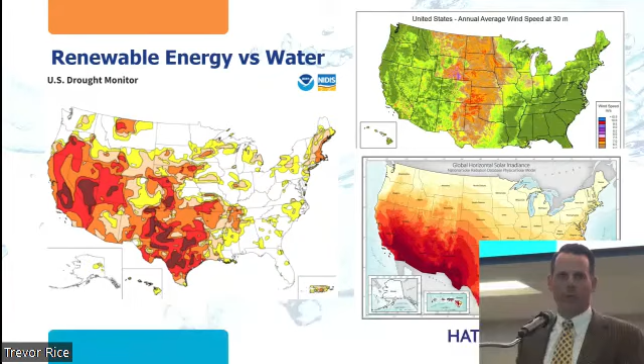Today, that's a little riskier. On the right, you'd see where am I going. If I'm going to install, subsidize, or invest in a green hydrogen production plant, where might I want to do that? I'm going to look at a place with the renewable resources required. So if you overlay wind speeds and solar irradiance maps, you get the best wind and the best sun locations.

Those same areas overlap with the places of highest water scarcity and highest drought risk. So land-based green hydrogen production is a problem, because where are you going to get the water to electrolyze, even with renewable electricity available? You've probably heard news items recently: avocado farmers in California use a lot of water and are trying to avoid paying for municipal water for crops. Also, how will states agree on using the dwindling Colorado River resources? The Mississippi River recently had drought conditions and receding water, revealing shipwrecks and dead bodies. From a reverse osmosis perspective, if you have shipwrecks and dead bodies, you'll need additional pre-filtration and treatment before the membranes, since membranes have very high filtration and block easily. Even with groundwater, freshwater, or rainwater, there are still impurities that need filtering — you won't reach ASTM 1 or 2 level water just by using groundwater.

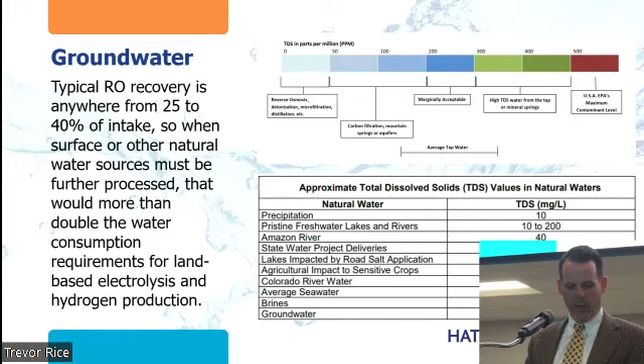Looking at time, I'm going to start going a little faster. I see you looking at your time as well. Thanks for keeping me honest.

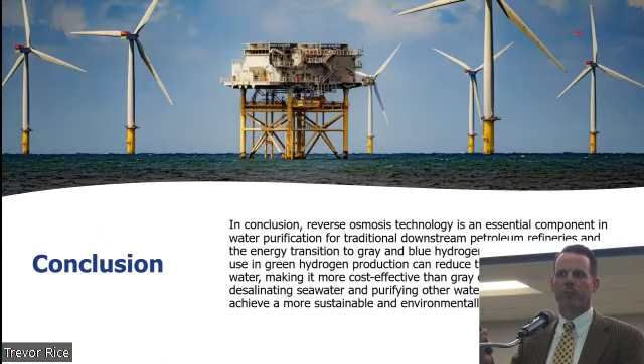If there's any questions, thank you. Thank you for the nice overview.